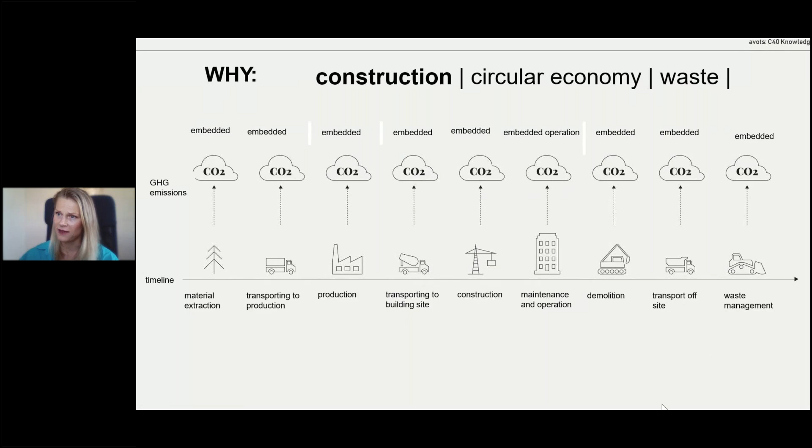In whole, we call it building life cycle. When we look at the emissions, they are mostly presented in the embedded emissions. And the life cycle of buildings looks something like that.

We expect that buildings, after their end of life, actually become just waste, just trash, and basically get to these waste management polygons. The question is whether this is really how we see our living space, our built space, our environment - that we produce something that becomes waste at the very end of its life.

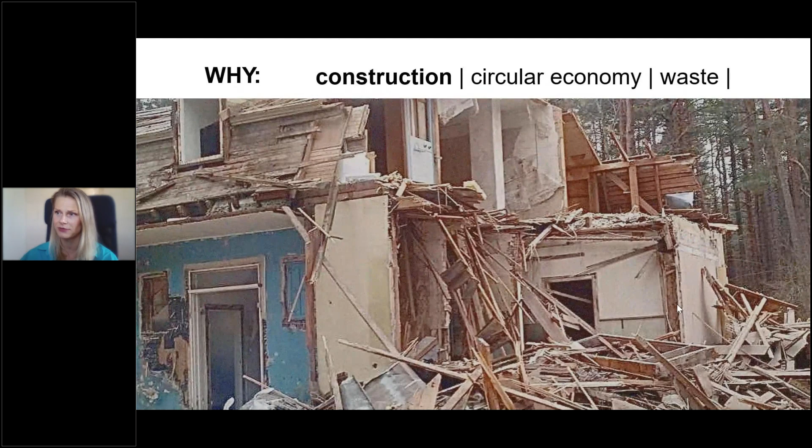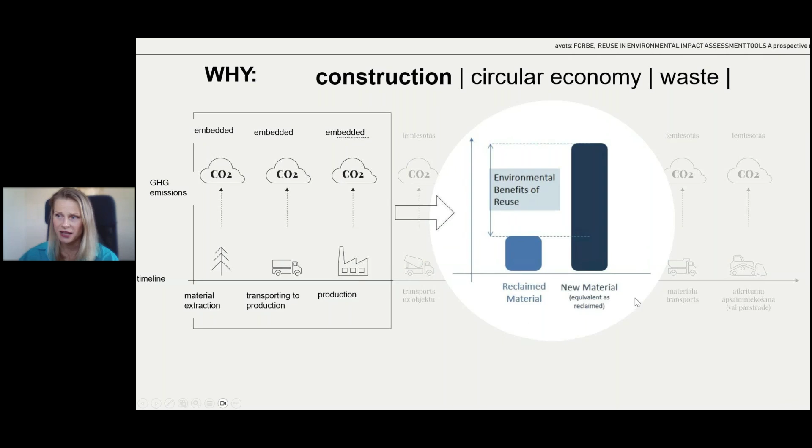Circular construction and building design presents environmental benefits if we actually circle back this first part of the embedded emissions, and we reclaim the materials. This is called their second life, third life, fourth life - however long we can keep the materials running in these cycles, instead of building from new materials constantly again and again.

This is where circular economy as such - as a way of thinking, operating, and as an economy - presents its benefits. So just to draw a short intro on the linear economy.

Linear economy is what we mostly see, or basically unsee, because we don't see the waste in our courtyard, and that makes us feel like it doesn't exist, but unfortunately it does. So from what we take, what we make, and what we use, we basically create the waste. This is the image that I showed you.

Recycling economy helps cope with a part of the waste, but there's still waste, and we are not very good at recycling, unfortunately. Circular economy makes sure that everything we take, we use again and again, and we do not create waste at all, or only a very minimal percentage - or we regain at the very end the energy from what we have wasted.

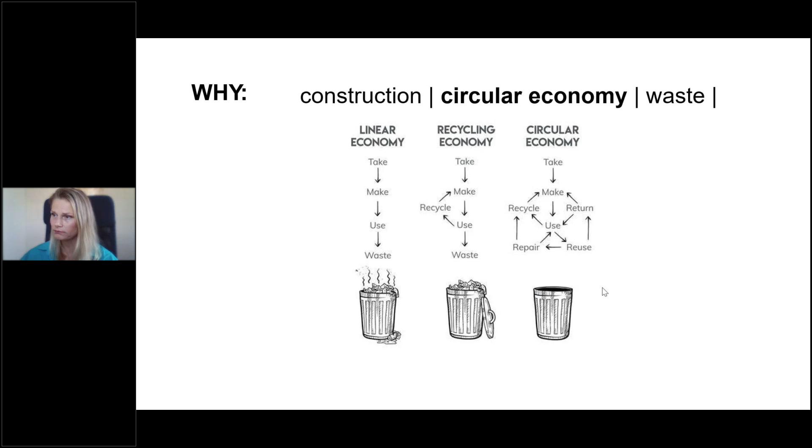So this is a very short overview of how circular economy works. I'm really hoping these are three key elements of why - the very reason to initiate the transition and become passionate about this circular building design.

This is where we turn to this ultimate wish to really change that trajectory of reality. And this is not something new. In fact, we were discussing with colleagues that no one taught us linear economy, right? But for some reason, we have to learn circular economy.

However, it is something that has been present in history and in the past. During limited resources or the early industrial revolution, we were under pressure to use what we had, because that was just necessity. Here on the right side of the slide, we see an image from Brussels, early 20th century, a demolition site, where if we look deeper into the image, we can see a billboard with all the materials mapped out and quantified, with their price tags.

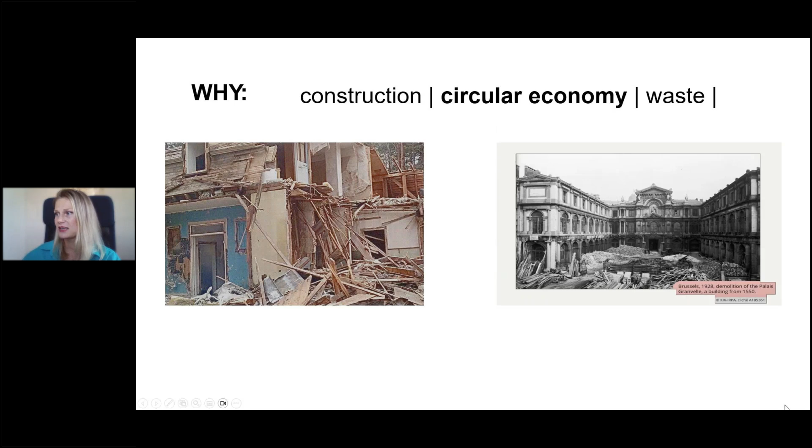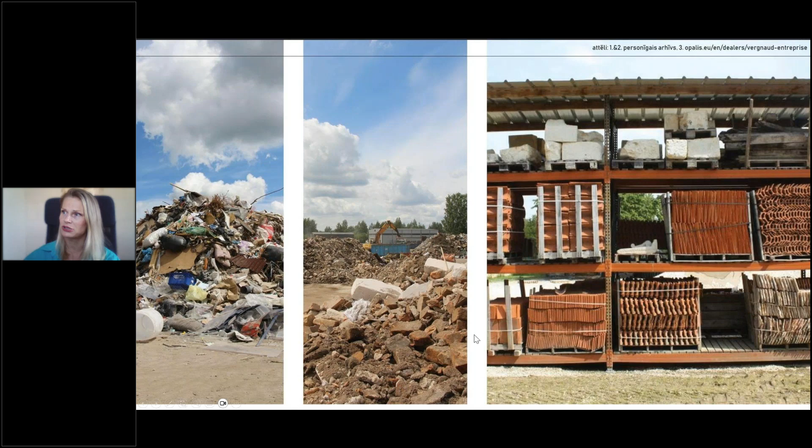This secondary market idea in construction is again nothing new. So I really hope the biggest 'why' is to get from this image - and I would say if you visit one wasteland site of construction waste, it's an unforgettable experience, and once you see it, you can't unsee it - to get to the ultimate circular construction, let's say, secondary market idea.

In order to do so, of course, all the mechanisms have to be in place. The tons of construction and demolition waste, the CDW, annually in the world, basically contribute to more than one third of the created waste in the EU, for example, annually.

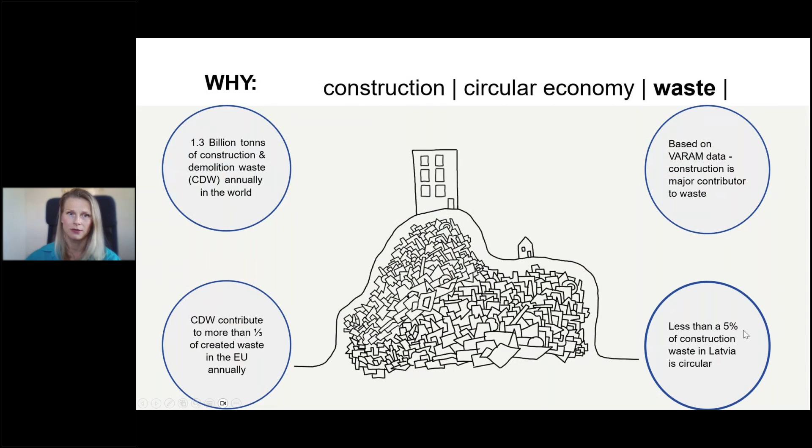During research in Latvia, for example, less than 5% of construction waste in Latvia is circular, and even that is in a questionable way circular - they are still, let's say, downcycled in their potential.

When we get to the how, some keywords and the essence of how to look at it is, first of all, to look from a design perspective, and a key topic here is design for disassembly, for new and for old and for renovations and other kinds of construction.

The second is reuse. So if you have designed it for disassembly, then you can reuse the materials. The third level is to recycle. Again, if you have designed it so that you can split it into parts, you can reuse it and also recycle what is possible to recycle into new construction materials or other kinds of material, hopefully not just once, but multiple times.

So for design for disassembly, modular design principles and construction involve designing buildings in modules, prefabricated modules that can be easily assembled and disassembled. Here again, it's a question of technology and engineering level, how far we are in that, and have we considered these modules in a systematic way to be constructed and deconstructed.

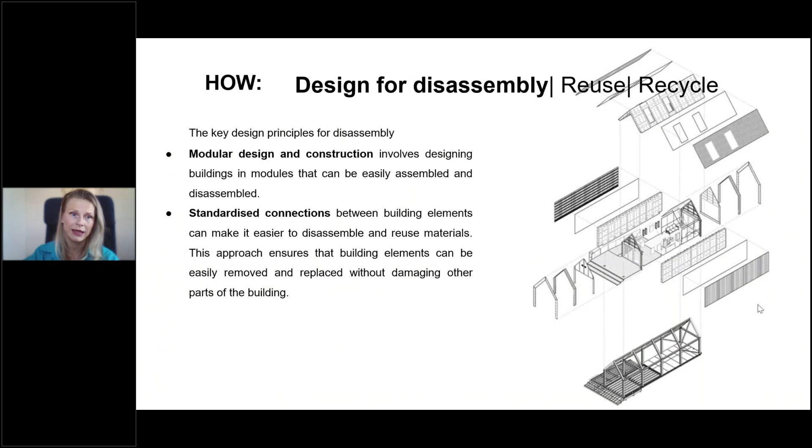Standardized connections, as with the previous examples in Latvia, Scandinavia, UK, and somewhere in Greece, mean these parts can be sourced and connected without damaging the other parts or the building itself. That ensures these connections can be disconnected without harming the modular elements that are part of the design.

Screws and bolts, instead of nails, for example, can be easily removed and reused again. Here I could also mention timber taps as something to consider, but timber is another topic I'll touch upon. Especially nails and adhesives can really damage the material, the wood in particular, but really all materials, and make it very difficult to reuse.

Labeling building elements and documenting relates to digitalization of buildings and construction, starting from the design phase into the detail of where each connection or joint is, how it's stuck together, from what kind of materials, and what kind of technology is used.

This whole information allows us to reuse the materials later on, or disassemble or retrofit, for example, some elements or details or materials when necessary, if they are broken or damaged or whatsoever.

Digital logbooks, starting with, let's say, BIM, but all kinds of digital logbooks of building materials and all the information that goes into construction.

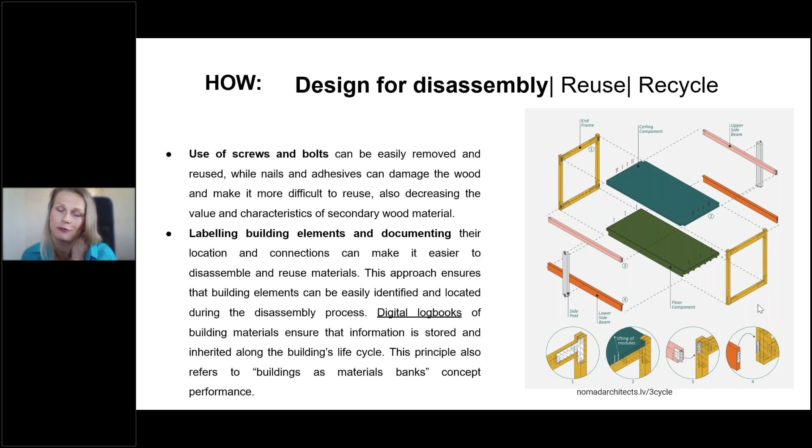This is, of course, force majeure, but just thinking of the future, buildings as material banks changes the perspective — instead of waste, we have a resource. So this documentation allows us to actually perform it.

From all of that, I want to touch upon circularity of wood material. This is also my research focus, and in our regional area, let's say Scandinavia, Baltic states, we have traditions of wood construction. However, you may come from elsewhere with your own regional or particular traditions — this shows how we turn to history and heritage to understand the perspective on what we actually have.

So auditing the knowledge, the resource, the practice, the approach in construction — what we have had. The origins of this circularity, in fact, taking 20, maybe 50, or 100 years back in this case, and understanding what could be circulated.

Coming from the very traditions of wood construction, of log house construction in the Scandi and Baltic Sea region, this provides us with these methods and access to material. I think around 45% of Latvian buildings are built from wood in one way or another, so this presents a very high potential for circularity if it is done correctly.

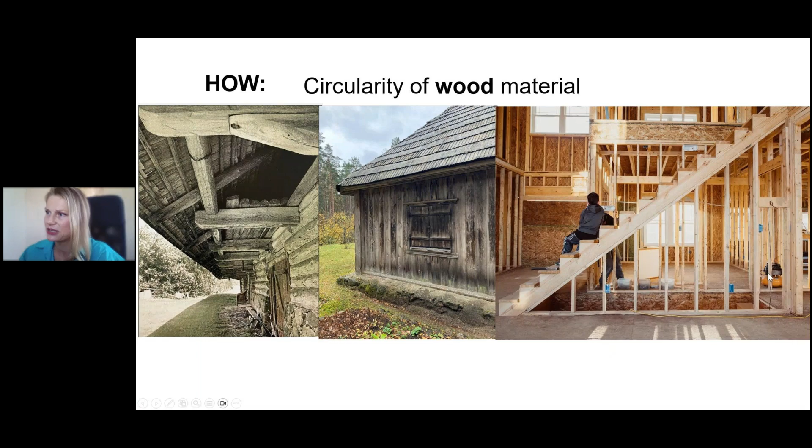In fact, here I have some numbers from research done in 2020. Three scenarios played out: if we would build a certain percentage of wooden buildings, even starting from new buildings.

I'm not considering—in this research they did not consider reconstructions and renovations—so new buildings from wood, in the highest scenario, range from a minimum of 10 million tons of CO2 per year to 700 million tons of CO2 in the highest scenario, when we maximize timber construction.

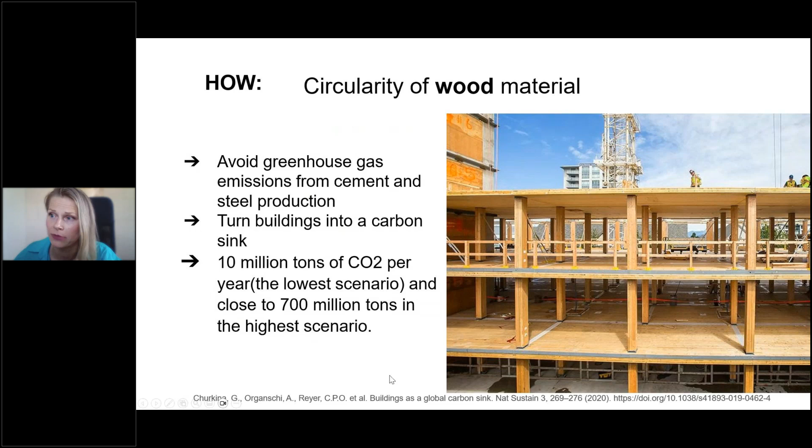So you will look at it in detail. Now I'm going to give you a kind of what—we understood the why, we understood the how. Of course it's not just about timber construction, but about the whole cycle, depending on where you are, where you're constructing, and whether you need to construct at all.

So this 3-cycle building system is a great case study. In fact, it provides you with a clear manual.

It's interesting to look at in detail, because in Estonia, basically the demand for new construction—public construction, kindergartens, hospitals—is much bigger than the construction sector can ensure or provide. So a new systematic approach has to be introduced in order to understand how to fulfill the demand, evolve, and develop.

So it's interesting that in this system, it adopts engineered wood, engineered timber, as the primary structural element, but all the other materials and elements from different materials also have their lowest footprint possible. The principles of how it is designed and could be constructed follow this design-for-disassembly principle.

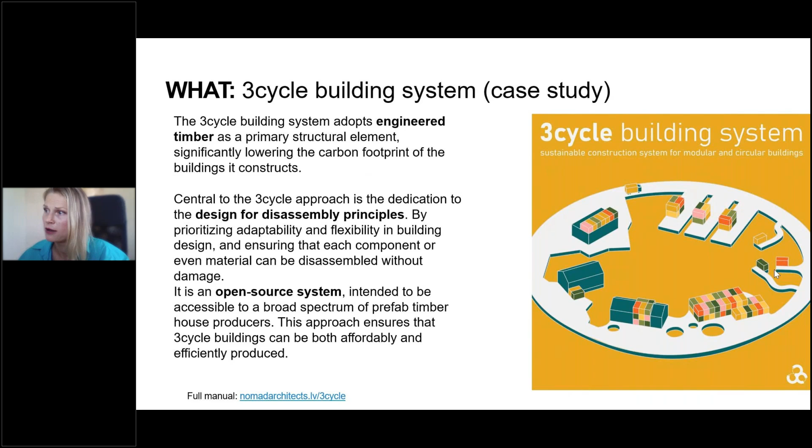The circularity within this three-cycle system—basically there are three types of modules, or scopes of the modules, that we could describe with: the element, where you can reuse the whole building; the module, the one produced, manufactured piece of the module you can use; and each component you can reuse.

In fact, I don't want to go much into detail—there are just so many circular building design aspects implemented and laid out for you, so just go and take it. The whole point is preserving the value, keeping materials from being dumped into landfills, or regaining energy instead of burning matter.

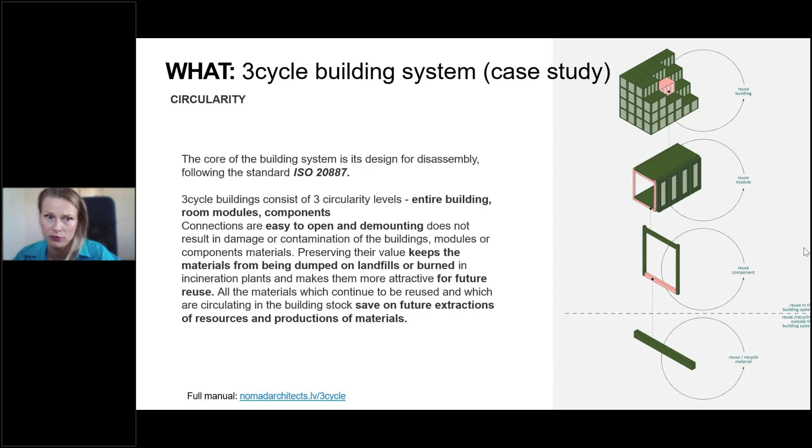The whole system is designed so that materials and elements are saved for future use, and of course then we avoid the necessity to extract resources and produce new materials.

You can see these patterns coming up at the moment in public procurements - so-called 369 pattern buildings, as dormitories, kindergartens, schools, and not just new buildings but also additions or extensions. These pattern buildings can range from residential purposes like houses and offices to public schools.

Kindergarten, hospital, or whatever - every pattern building of this sort is mass customizable. So if the manufacturing systems are customized, they're adjustable, environmentally friendly, and made primarily of timber. You have to evaluate what source of timber, where from, and how much embedded carbon we collect if we don't have that material at hand.

Modular and prefabricated, ready to produce, assembled and transported in most European countries. The whole idea is that this 3-6-9 system, this 3-cycle building system, can be applied by almost every manufacturer - the closest, local manufacturer of yours.

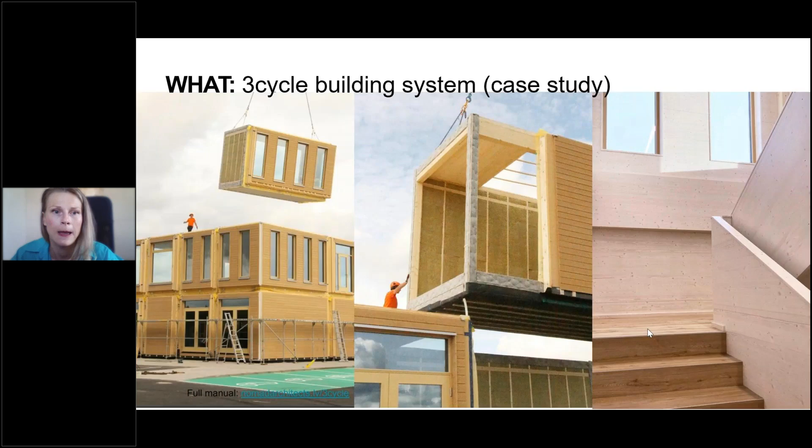From all the information I could give you in this short time, I really urge you to look into the very good circular building design toolkit by Arup - very practical and at the same time very inspirational as a guideline to sustainable construction approach. It covers design, construction, maintenance, and wraps up circular building design as such.

First of all, consider whether you need to build something new or not. Repurposing and retrofitting existing buildings and constructions is something you have to consider. If you want to be sustainable, don't build anything - but evaluate your options.

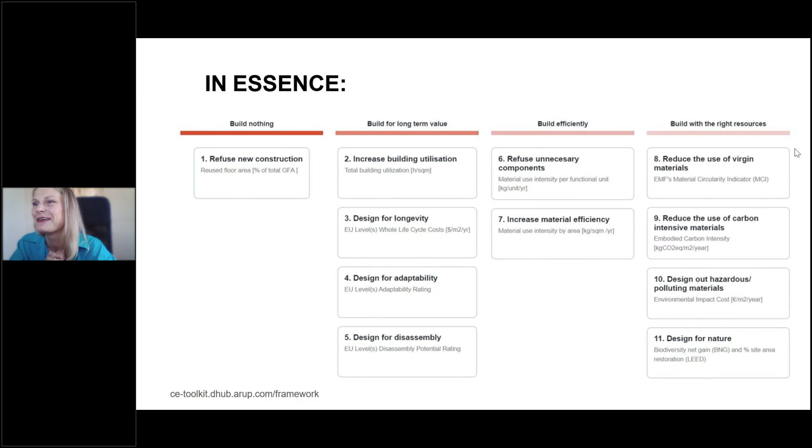Build for long-term value - increasing the utilization of your building if it already exists. Seasonal, daily, nightly utilization - how the building can be used 24/7 for different groups, various users and purposes. Design for longevity, design for adaptability.

This modular system - design for disassembly. The needs may change even in your residential house. Think about it - it's never a ready product, the house is never ready, you always have change. Life changes and economy changes, and everything changes around it. So to create maximum value from buildings, design for adaptability, and therefore design for disassembly and reassembly.

Build efficiently - this is the operational part. Build for less embedded operational CO2, so unnecessary components you don't need, and increase material efficiency from a CO2 perspective and insulation perspective, according to the actual use of the building and building parts.

Reduce the use of virgin materials, so build with the right resources. Think about locality first. This is why I love the 3-6-9 system - if you source it from local producers and local manufacturers, they come into the value chain and source from their local producers and partners. This whole chain works for a sustainable building and sustainable future of the built environment.

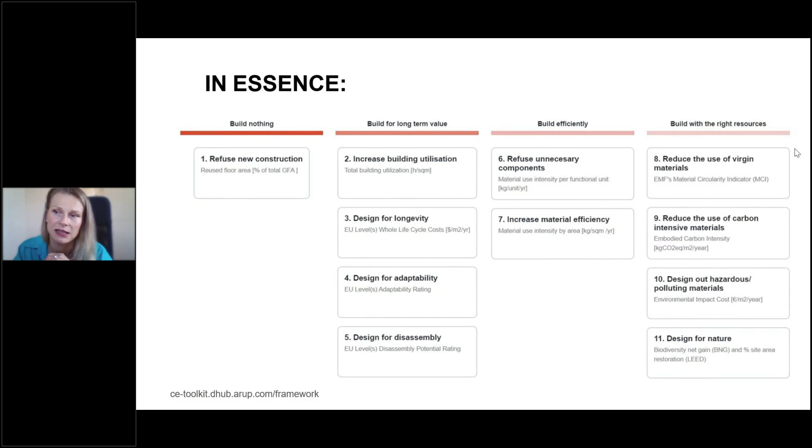I want to leave you with good links and resources where you can look if you need to find keywords, read something, or do and practice something around the circular design of buildings. Thank you very much.

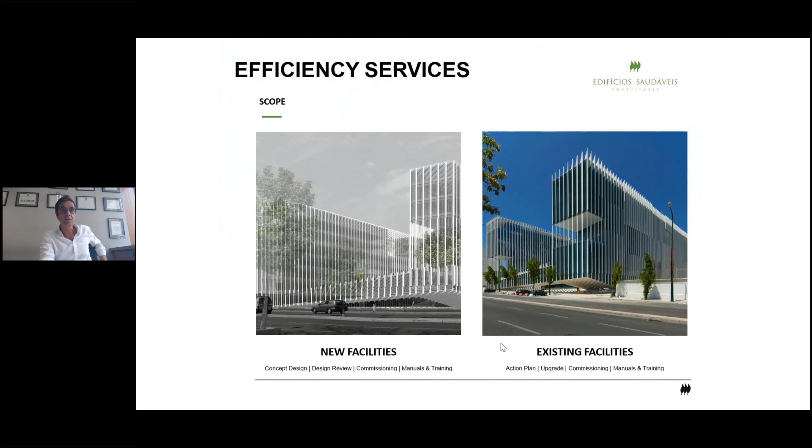Energy efficiency - everybody knows what it is, I don't need to explain. But I just want to refer that we work both with existing buildings, from deep hardware refurbishments to the fine-tuning of building management systems without any hardware intervention, but also during the design and concept phase of new buildings, helping owners and designers take the best options.

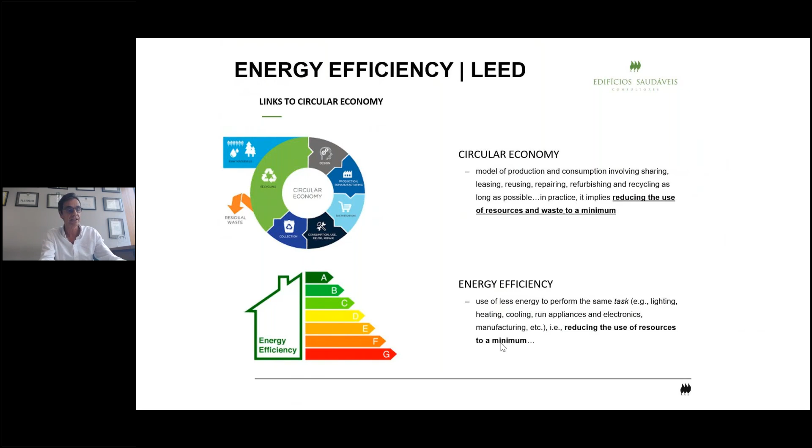This is obviously strongly related to circular economy - it's all about reducing the use of resources, environmental impacts, and waste associated with energy production and distribution. I want to highlight two things from our long-term experience.

The first is to stress the importance of the human factor, because it is often possible to achieve very relevant savings without any major change in the hardware of the building - you don't need to change the central plants or the walls, just optimize how the facility is managed. Why? Because the skills of operation and maintenance teams are not aligned with the sophistication of current systems and controls.

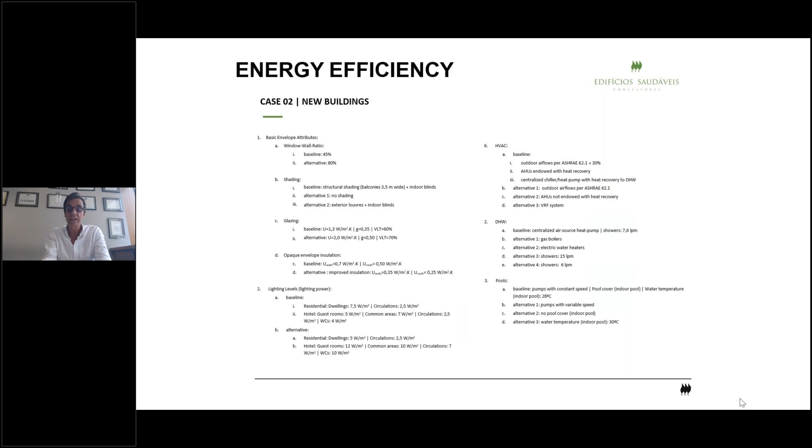I cannot go into the details in such a short presentation, but two highlights. The first is to show you the importance of this - this is a real, recent case. We can see that the difference between adopting all the best assumptions, the best scenarios, versus the opposite, adopting the worst scenarios, is 70%.

It's really very relevant. Please note that, again, after the building is built, this difference will be present year after year. And just to show you, the final design of the building does not fit totally with the best-case scenario, but it is clearly much closer to the best case than to the worst case - so we could not implement all the best solutions, but almost all. So the importance of this early involvement becomes clear from this.

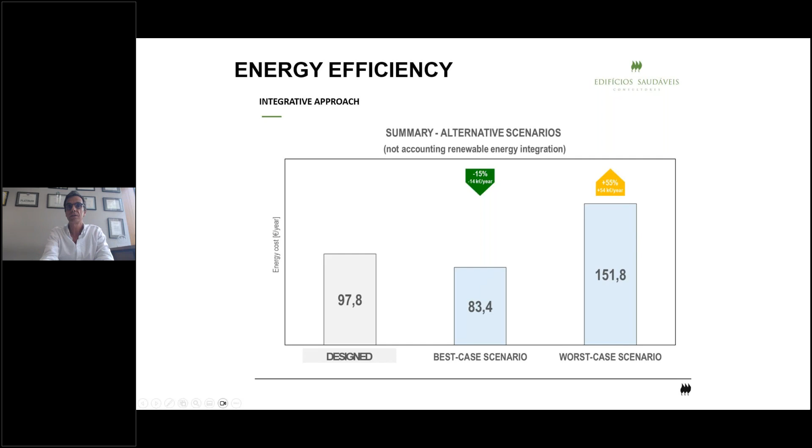So another highlight, just to illustrate the link between water use and energy use. This is a hotel, and one of the alternatives we discussed was the type of showers - there are showers efficient from the perspective of water use, with flows around 8 liters per minute of water.

In the beginning, the owner was thinking about a more luxurious - well, not exactly luxury, but a different shower with a much higher water flow. This would have an impact because it's a hotel, so much of the water use is hot water for showers, so it affects energy use too. We found that this would increase the energy use of the hotel by 5% per year.

The energy of the whole building, not just the energy associated with water, increases by 5%. And what I would like to stress is the difference with this scenario here.

We double the insulation level when compared with our legal requirement. I'm speaking in Portugal, so it's a mild climate, not an extreme climate. We also evaluate the impact of doubling the insulation, and we have only a 1% impact. So the impact of simply selecting good showers is much higher than the impact of extra insulating the opaque envelope.

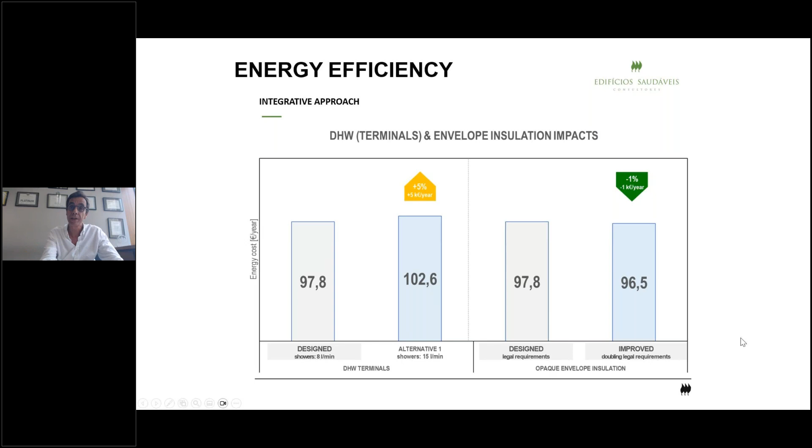Here we can speak about certification schemes because this can be a good solution for split incentives - this can be one of the roles of good and widely recognized certification schemes. Because if the market recognizes these schemes and buyers or tenants assign value to buildings that are certified, and typically this is the case, if the certification implies high levels of energy efficiency amongst other things, then the certification will clearly help solve the problem of split incentives, because the owner is investing and will get some return from that investment.

So let's focus on one of the certification schemes we work with, LEED. LEED was awarded by the United Nations for its contribution to enhancing design, construction, and operation.

It considers, or tries to consider, all the environmental impacts of a building - energy, of course, but also water, materials, all the impacts, all the emissions to the environment. It organizes these impacts into different boxes, and then defines good practices for each box, and the building is certified according to the quantity of good practices it can implement. A very short description, but I think people are already familiarized with this kind of system.

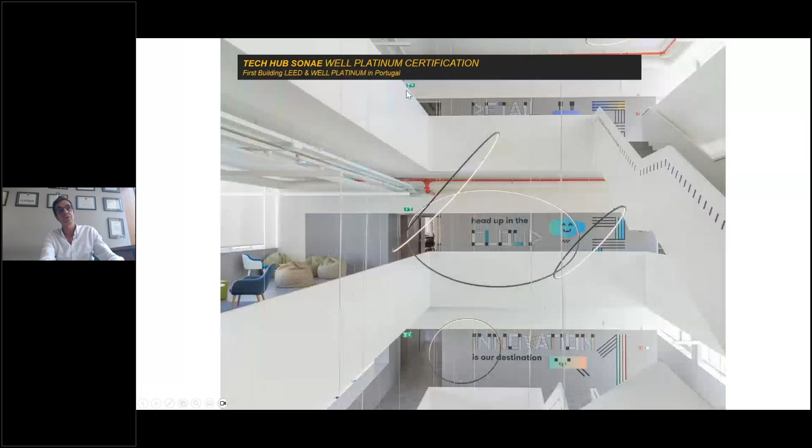And to finish this small set of examples, this office building, certified 2 or 3 years ago, is amongst the top 100 of more than 50,000 buildings in the world in what relates to its score. It is also certified by WELL. WELL is another certification scheme complementary to LEED - LEED is focused on environment, WELL is focused on health and well-being, but we don't have time to speak about this.

So where is the link between these certification schemes? I was speaking about LEED, I could be speaking about BREEAM - they are quite similar, and there are others of course. Is there any link between these certification schemes and circular economy?

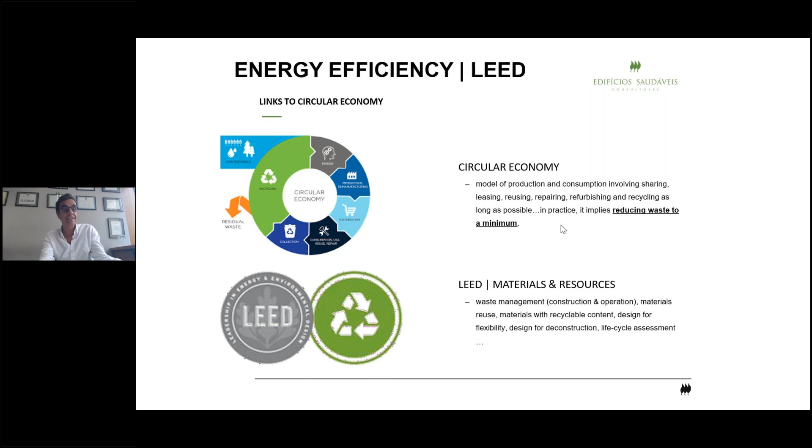Of course there is. There are a lot of credits for good practices related to waste management, both during construction and operation phase, materials reuse, materials recyclable content, design for flexibility, design for deconstruction - all that is included. But also life cycle assessment, which was detailed in the last presentation by Gonita, so I will not go into details.

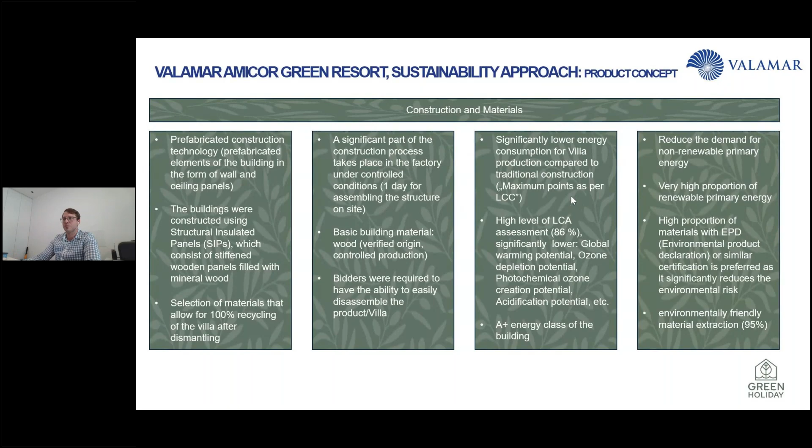The third very important category is the Green Building Certificate. We chose DGNB specifically for its holistic approach. They take into account six criteria and sub-criteria: economic, environmental, technical, process, and social, cultural, and functional criteria. We achieved gold level in the pre-certification process, and right now we are in progress for certification, where there is of course possible room for improvement, but I think we'll stay on the gold level.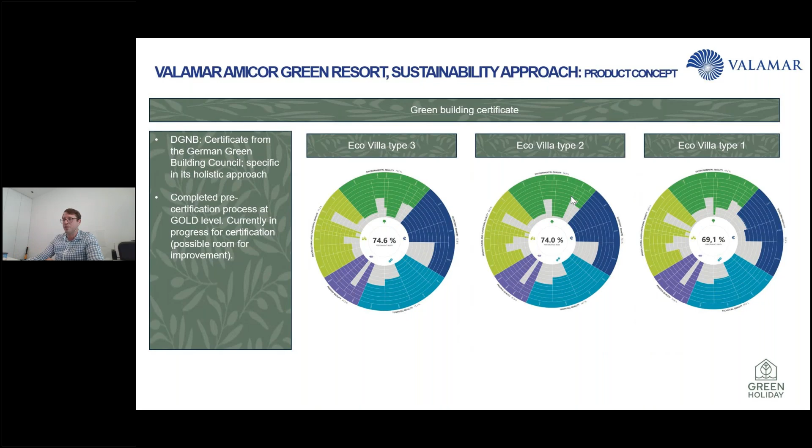The third one is interior and exterior design - involvement of users in the decision-making process. We asked our guests their opinion about our mock-up villas, and one of the most important conditions for architects and designers is design for all: barrier-free access to the building, high-quality floor plan, all communications wide enough and illuminated by daylight, airing, and floor plan without barriers. Also, in interior design, we use furniture and equipment with biophilic elements.

Involvement of users in the decision-making process was very important because they gave us very valuable feedback.

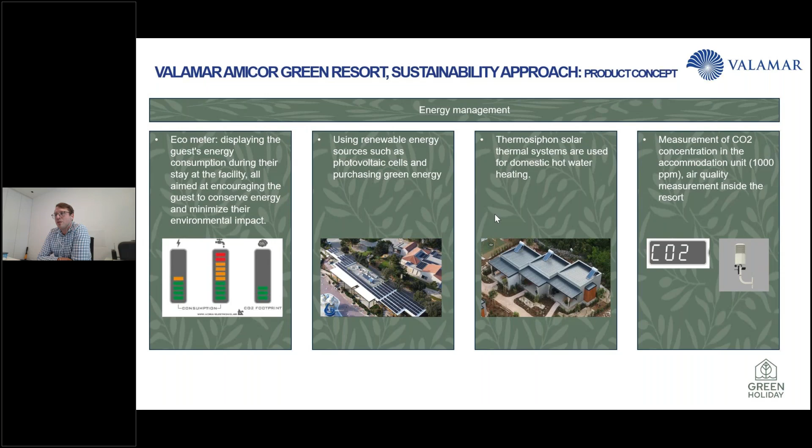We also have air quality measurements inside the resort. The results can be found on the TVs in public spaces, and of course on TVs in the accommodation units. And the last category, also very important, is waste management, water management, and biodiversity. Here I want to show you some specific, real-life examples.

We have no plastic for the toiletries; the packaging is only recyclable. All plastic items are substituted with biodegradable options: slippers, straws, disposable underwear for spa treatments. We avoid waste by not using plastic, providing waste-separating facilities, and refillable containers for shower lotion, body lotion, and shampoo. There's also very important education and training of staff regarding waste separation and recycling. The waste produced is separated and passed on to external companies for recycling.

We also control that process: constant optimization of food waste. For example, this year we have planned to buy a biocomposter. Water consumption monitoring, water consumption per guest, and defining a reduction plan year by year.

Water saving taps, shower heads, toilet flushes, spice and vegetable gardens. Some important note, 70% of our fresh ingredients are locally sourced. And we have an education garden for children, where they can learn about sustainability, plus hotels for insects and bird houses.

Your child will get a check-in cardboard package to assemble a bird house. We make benches and other furniture from felled trees during construction, and we avoid grassy areas that require irrigation.